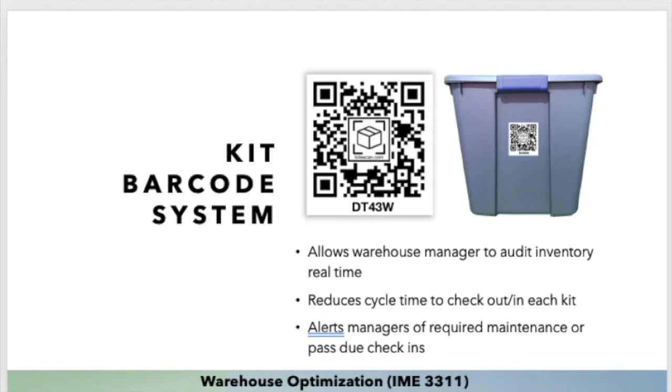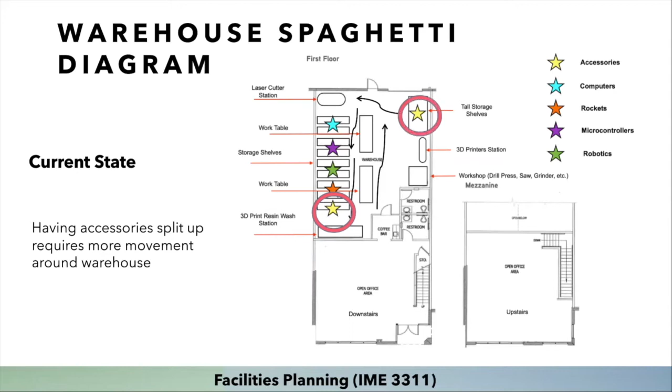The warehouse originally had the accessories near the 3D print wash station. Since there are two different accessory locations spaced so far apart, there was a lot of travel time between the two. In the updated system, the accessories were moved to be closer together, and the print station was moved closer to the wash station.

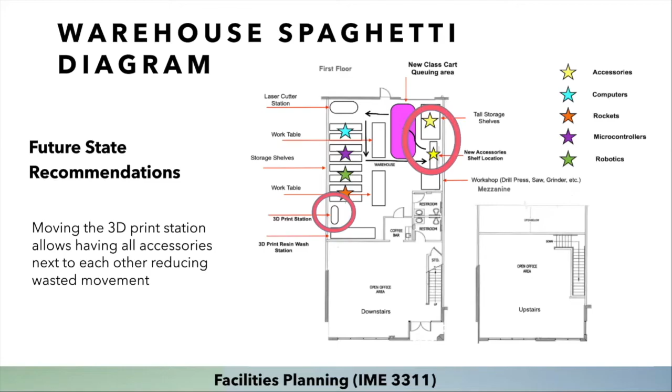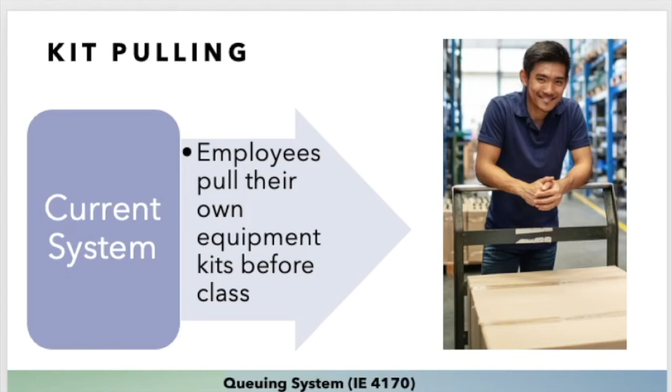A new class cart queuing area was also installed in preparation for the future system. The kit pulling system originally required instructors to pull their own equipment, but in the future system, there are dedicated employees who retrieve kits from the shelves and place them in a new queue for instructors to pick up.

Using the recommendations for the future state and incorporating the database, layout improvement, and queuing system into the warehouse, the kit check-in and check-out cycle time was reduced by nearly 65%, from 12 minutes and 48 seconds to 4 minutes and 33 seconds.

The estimated cost savings utilizing the future system is approximately $12,000 per year, and 825 labor hours are saved per year. This was calculated based upon 25 class carts per day at $15 an hour wages.

Next, Wendy will talk about the robotic activity mat sales and game pieces.

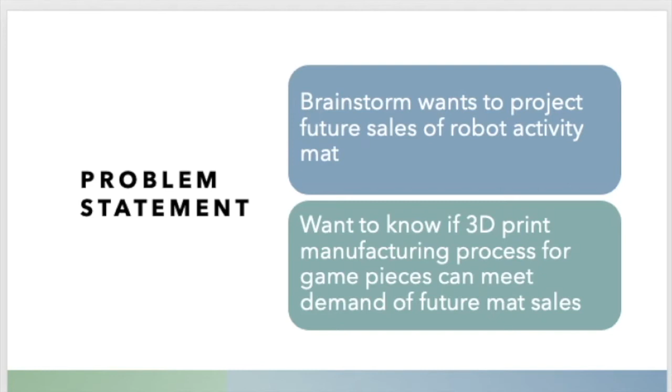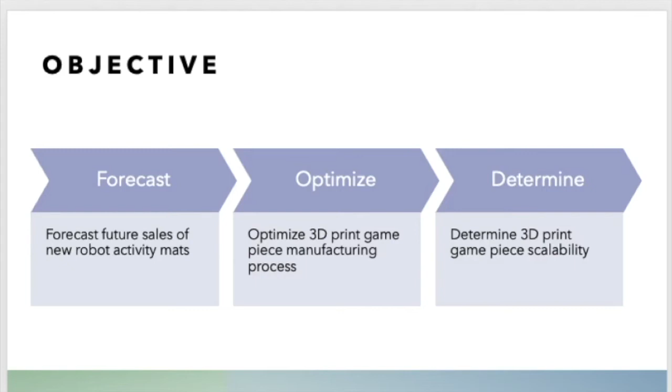Brainstorm is currently trying to project future sales of their new robot activity mat. Each mat uses 3D printed game pieces. We want to know if they can meet future demand manufacturing in-house. Our objective is to forecast future sales of their new activity mat product, optimize current 3D print manufacturing processes, and determine game piece scalability. The robotic activity mat is a brand new product for Brainstorm.

Our team was able to acquire sales data from January 2020 to June 2020. With this data, we were able to forecast future sales through October 2020 with upper and lower bound confidence levels.

Current state has a unique design and custom look. It's 3D printed; however, it has low production capability and is labor intensive.

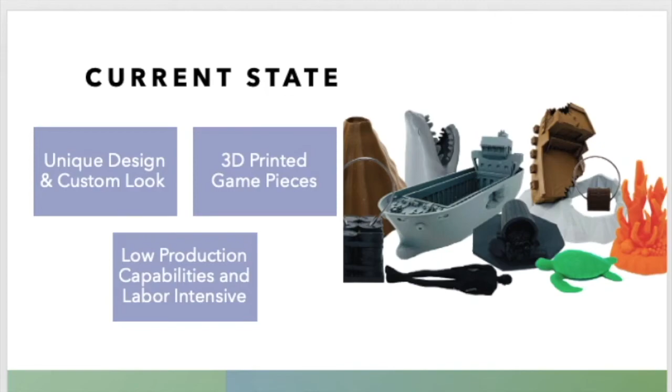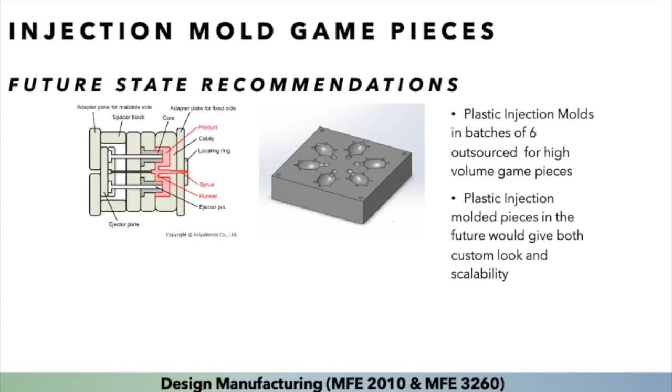One alternative our team looked at was injection mold game pieces. Plastic injection mold offers a unique and custom design similar to Brainstorm's current piece while providing high volume production. Unfortunately, due to financial restraints, the mold itself is not feasible at this current time.

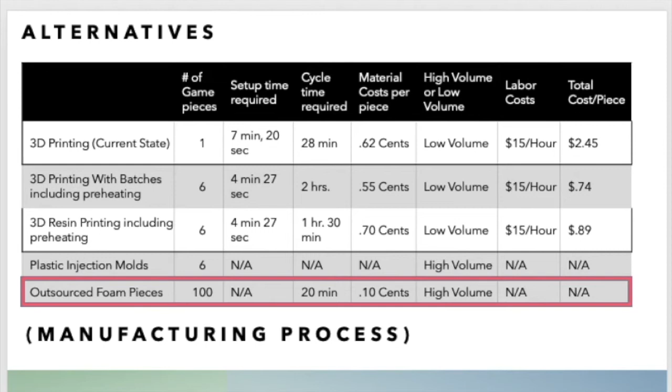Brainstorm's new partnership with Amazon and Geyer required Brainstorm's ability to scale up the game pieces immediately. This resulted in having to outsource game pieces with a third-party manufacturer that produced foam game pieces. Above is an example of one they produced.

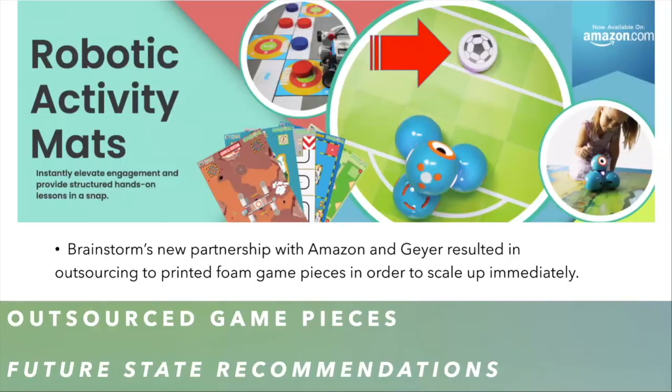With our recommendations, Brainstorm will have an estimated cost savings of about $97,000 while reducing 5,200 labor hours, based on the average of 1,200 activity mats sold per year.

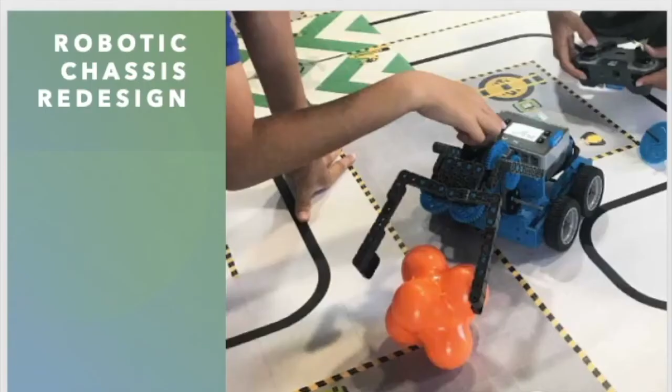Next, Gabino is going to talk about the redesign of a robotic chassis.

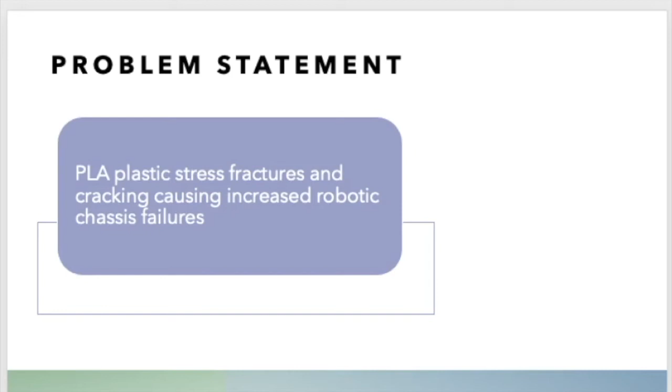Brainstorm's Vex robotic platform is currently experiencing stress fractures and cracking, causing the robotic chassis to fail. In order to remedy this, our objective was to analyze the current manufacturing process to find the major defects in the chassis. Once those defects were found, alternative materials were tested in search of a stronger, more durable chassis. Once the new material was selected, we plan to implement this material into the redesign and standardize the new chassis.

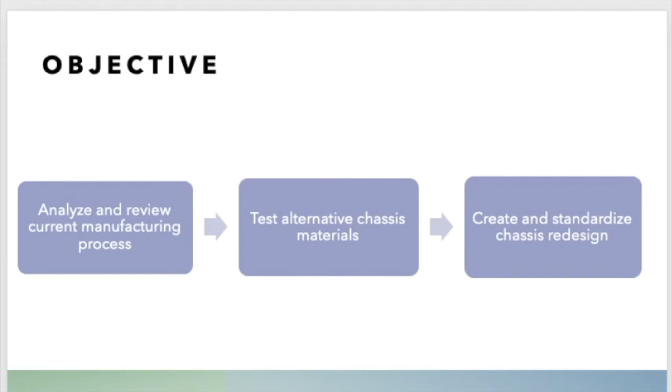The current chassis is printed using the FDM printing process. It is printed using PLA plastic, utilizing a honeycomb pattern. The company is only using a 30% infill density in order to reduce material costs and keep print time around 5 hours and 40 minutes.

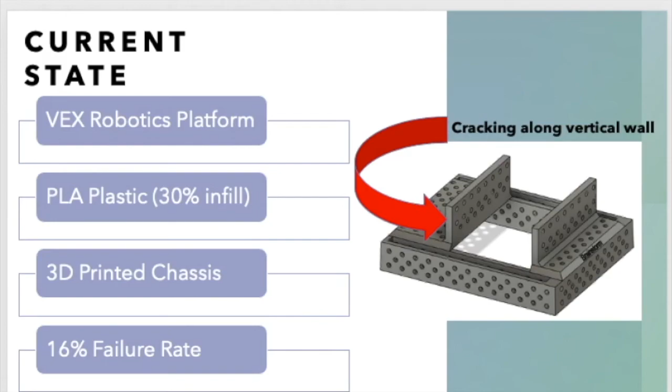Alternative production methods were considered, including aluminum casting, sheet metal, and plastic injection molding. The chassis will require heavy modification for it to be castable, and even then, the casted model would be too dangerous for some of the smaller children to handle.

A sheet metal version will require intricate design to completely remove burrs and make it safe for children. Due to the current demand of the chassis, plastic injection would be too costly. The current demand does not justify using plastic injection as a production method.

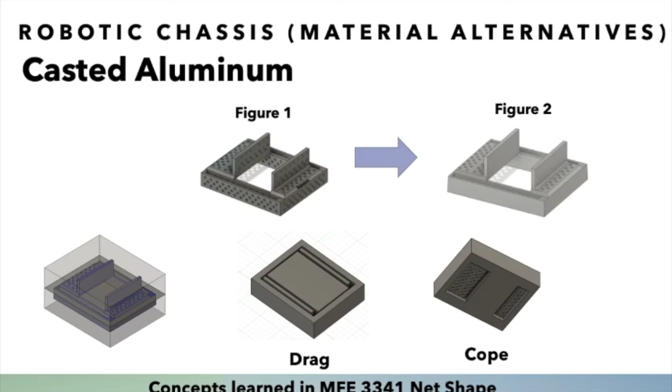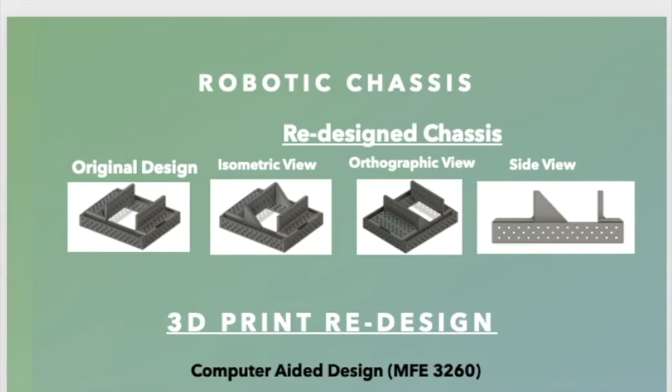In order to add strength to the chassis, trusses were added to the redesign. This triangular shape greatly improves the strength of the chassis, resulting in a lower failure rate.

In addition to redesigning, the material was changed from PLA to ABS plastic. ABS plastic has superior durability characteristics over PLA. Although ABS is harder to work with than PLA, the improved ductility is better suited for end use.

The infill density was increased from 30% to 55%, resulting in an estimated failure rate of 1.3%. Highlighted by the animation, you see once again the truss that is utilized to reduce stress fractures within the chassis.

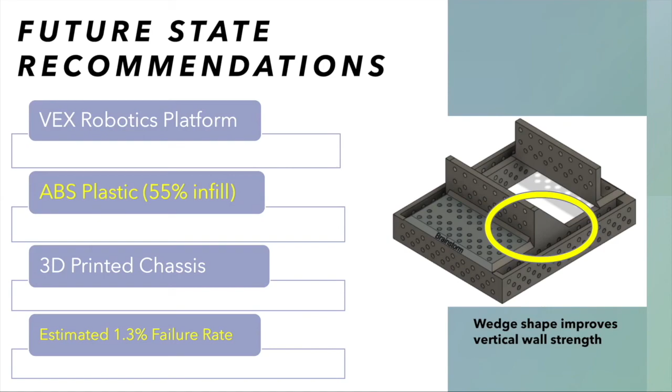With the failure rate reduced to 1.3%, we saved 28 labor hours and an estimated cost savings per year of $420. We were able to accomplish this by reducing the number of replacement chassis that need to be reprinted. This time saved opens up the 3D printers to be utilized for purposes other than replacing broken parts.

And now here is Sean with our closing remarks.

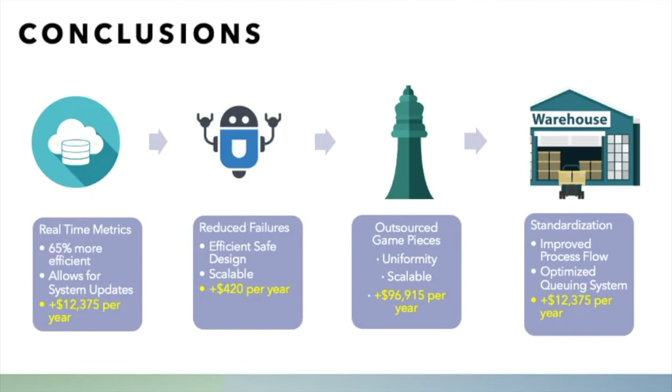Project conclusions: the SQL database now provides real-time metrics, allows system updates and future iterations. It also saved about $12,000 per year.

For the robotic chassis, we reduced failures, created an efficient, safe, and scalable design, and also saved about $420 per year. Game pieces are now outsourced, allowing for better uniformity and exponentially higher production. This saved Brainstorm about $97,000 per year, as opposed to if they were to continue manufacturing in-house.

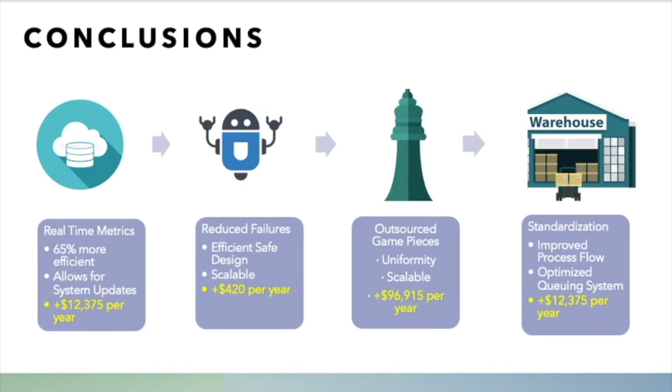Warehouse operations are now standardized, have better process flow, and have an optimized pooling and queuing system for class equipment kits.

Our economic analysis shows current costs for warehouse operations, game piece production, and robot chassis manufacturing. Their current system estimated cost is about $125,000 per year.

With our future state recommendations, they'll save around $110,000 a year. We expect our system recommendations to be viable for at least 10 years.

Some of our recommendations to Brainstorm were to outsource robot activity mat game pieces, move stored accessory kits together, optimizing process flow and eliminating wasted movement in the warehouse. Lastly, to incorporate the cart queuing system for instructors' class equipment.